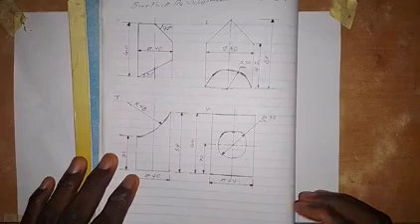Welcome back to my channel. Here we want to work on this particular problem, and it has to do with surface development of cylinders. We have worked on this one and this one.

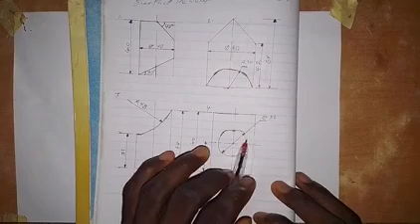We want to work on this last one, based on the dimensions that we have here. So the diameter is 44 millimeters and the height is 60 millimeters. Distance from here to the center line of this circle is 30, and the diameter of the circle is 32 millimeters. We are going to make use of this dimension to solve this problem.

So what we need to do first is draw a vertical center line, like this. I need to bring it down a bit so it goes properly. Then we come up a bit and draw a horizontal center line like this, and then with a compass take a measurement of 22 millimeters, which is half of 44 millimeters.

So we take 22 millimeters here, so this is 22 millimeters. Then putting a pinpoint to our compass here at this point, we draw a circle like this, and we're going to divide this circle into 12 equal parts.

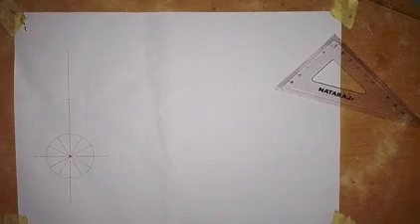So there it is. We draw from here to here, and we also draw from here to here. Then we turn to this side, so we draw from here to here, and then also from here to here.

I'm going to number the points on this circle. I'm going to call this 0. So this is 0, this is 1, this is 2, this is 3, here is 4, this is 5, 6, 7, 8, this is 9, this is 10, and this is 11.

So we come up a little bit and draw a horizontal line here like this, and then I'm going to take a measurement of 60 millimeters for the height. So this is 60 millimeters. Then I will also take 30 millimeters for the center of the circle that we have there.

So I'm going to draw a vertical line from this point 0 here. Draw a vertical line from 0, so it goes up from here like this, and then also from here we draw a vertical line.

So then we draw a horizontal line here. I will make this horizontal line a thick line at once like this. Then on this center line here, we draw a horizontal center line through this point.

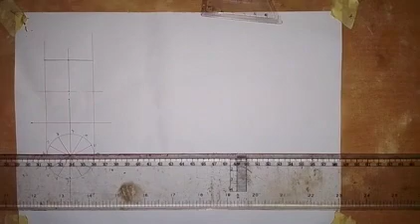I will take my compass and take a measurement of 16 millimeters, which is half of 32 millimeters. Since the diameter of the circle at the center is 32, the radius is 16. So we take a measurement of 16 millimeters like this.

Then putting that at the center here, I will draw a circle. So draw a circle like this.

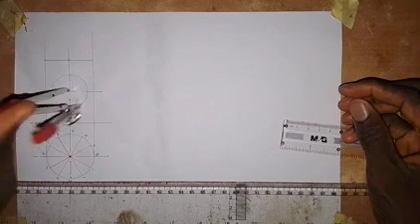So then we are going to make this line. This line is a thick line, and this line here also is a thick line. Then the line at the base here we also make a thick line like this.

Now the next thing I'm going to do is, with my compass, transfer these points on the circle into the front elevation. So from the plan we transfer: 1 and 11 go together, so here we draw a vertical line. Then 2 and 10 go together, so we draw a vertical line here like this. Then we have what we have drawn out of 3 and 9, which is the center line. Then 4 and 8 go together, so here from 8 I will draw a vertical line.

Then 5 and 7 go together, so from 7 I will draw a vertical line like this. Alright, so with what we have here, we are going to produce the surface development.

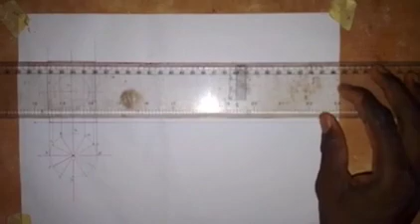So what we need to do now is, from this base here, draw a horizontal line like this, and then we come up here also and draw a horizontal line from this point. Then I'm going to move away a little bit and draw a vertical line. So I can decide to use anywhere that I like as a seam.

So I'm cutting it here and I want to spread it. I'm cutting it from this 0, so that means this point will be 0.0.

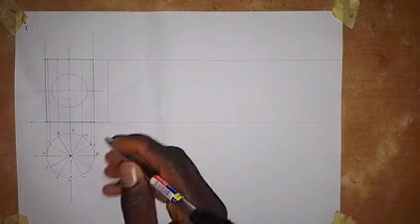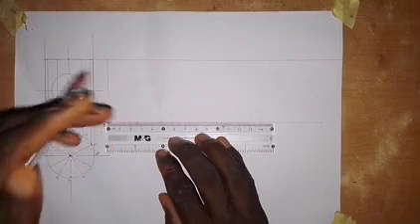Then I will calculate the circumference of this circle. The circumference of this circle, which I've done, is 138 millimeters. So I'll take a measurement of 138 millimeters from here. That is what we have this to be, 138 millimeters. So this 138 millimeters I'm going to divide into 12 equal parts.

Okay, so from here I will draw a line at an angle to the line. I'm going to take 12 points here on this line, so 12 different points on this line.

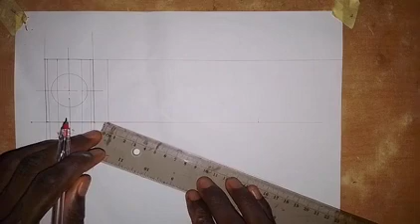So here we have what we have. This is 1, this is 2, this is 3, this is 4, this is 5, 6, 7, this is 8, so this is 9, here is 10, so we have 11, and then we have what we have 12.

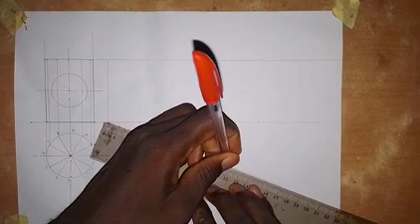Alright, so we join the last one to the end of the line. I'm going to pause the video and do the rest, then I'll come and show you the next thing to do.

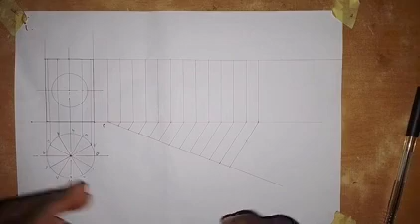Alright, so I have drawn the lines, join the point here, dividing the distance from this 0 to 0. So this point will also be 0. If you cut it here, we're going to have 0 on both sides, so this is also 0. So I divided into 12 equal parts, I divided the circle into 12 equal parts.

Then I need to number. This is 1, 11. So this point will be 1, and this will be 11. Then we have what we have 2, here we have what we have 10. So we have 3, then we have what we have 9.

Then we have 4. Then next is what? So we have 4, so 4 goes with 8. So we have this. Then next we have what we have 5, and then we have what we have 7. So 6 will be in the middle here. So we have those points.

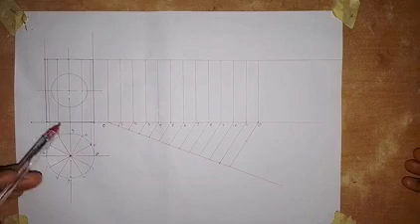So the next that we are going to do is make sure we have this circle drawn in here. So we also have the circle on both sides, so we need to draw it here and also around here.

Now if you look at the midpoint that we have here, this point is 3 and 9. Okay, so we have this point 3 now, so this is point 3 here on the line, and this is point 9. So we are making use of this point, and then we are going to locate this point here, we need to get this point.

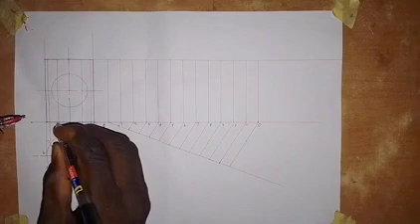This is point 8, so we have this point 8 already. So point 8, we have what, 8 and 4, they are together. So we have this point 4, and then we have this point 8 here.

And then we also have point 2 and 10. So this is point 2 here, and on this side we have what we have point 10. So let's be taking note of that.

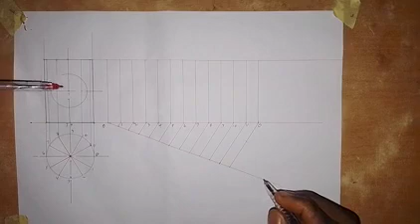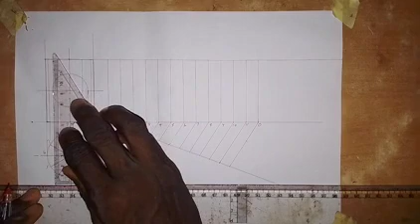But another thing that we need to do is that we don't have a line on this point of the circle, and we don't have any line on this point of the circle, so we are going to create it ourselves. So from this point here, I will draw a vertical line from here to touch this point, and I'll also draw a line from here to touch this point on the circle. Now I will take my compass.

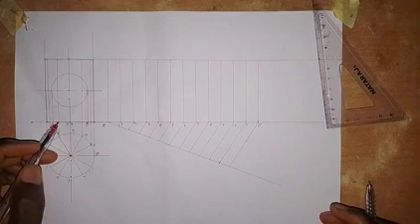Let's call this point A and this point B. So from point A to this point here, we are taking this point. From here we take this point, and we also take this one. This is point 8, which we already have. Point 4 and 8, we already have those points, and then we also have point 2 and 10. So we just get point B, and then we get point A.

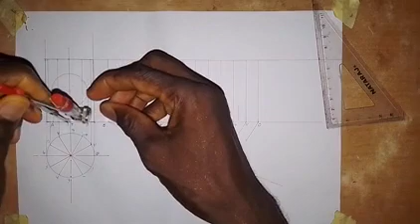So what we need to do now is, with our compass, I'll just do it at once. I don't have to be taking it both sides. So I just put the midpoint of my compass here and extend it to this point B here, to this point B. So if I put at point 3 here...

...so I will get it on this side, and I will also get it on this side, I get it on both sides. Then if I put at point 9, I will also get it on both sides, getting it here and getting it here like this.

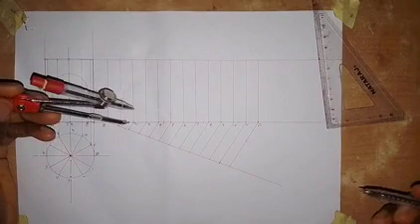So if you look at the one that we have here, this is after 2, so after this 2, that's where we have it. And then it also goes with 10, so after 10, it goes with 10. This is after 2 here, from here to here. Then after 10, that is from here to here. Another one that we have is 4, 8.

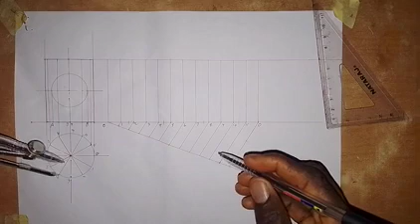So behind 4, we have it here. And at the front of 8, we have it here. Just look at the way I'm doing it.

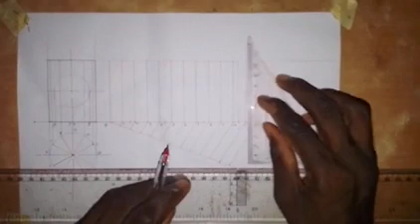Now we are going to draw a vertical line here like this. And at this point also, I will draw a vertical line. Then at this point, I will draw a vertical line here, and also at this point, we will draw a vertical line.

Based on the labeling that I did, this is point A here, and this is point B here. Let's take note of it. And also, this is point A here, and this is point B here.

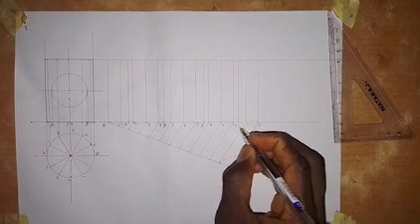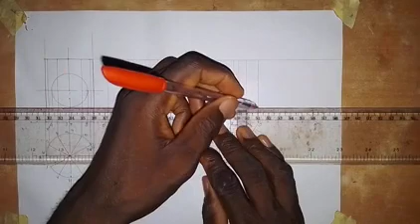So this point that we have here goes for 3 and 9. If I come up here, I will draw a horizontal line like this, and look for where this line intersects 3 and 9. It intersects 3 at this point, and it intersects 9 at this point.

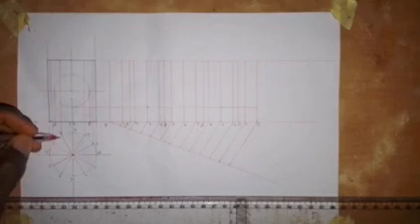So then this is point 8, and this is point 10. Don't forget that 8 and 4, they are together, and 2 and 10, they are together. If I draw a horizontal line from this point, I go and look for where it intersects. It intersects 2 at this point.

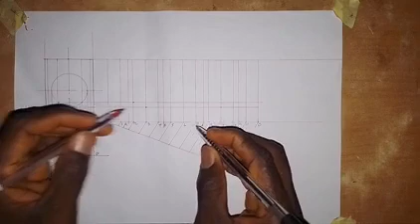I will also look for where it intersects 4 — this is the point here. Then I will look for where it intersects 8, which is at this point here. Then where it intersects 10, which is this point.

Okay, so next, A and B. Here we have A, this is the point. If I draw a horizontal line from here, we have A and we have B at this point, on the same horizontal line.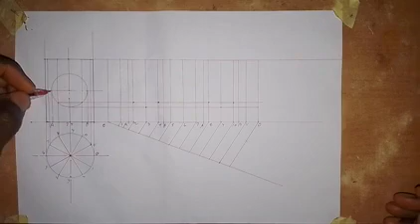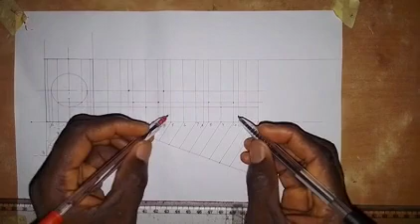If I draw a horizontal line from here like this, I look for where it intersects 1 — at this point here. Then it intersects 5 at this point. Next, it intersects 7 at this point, and it intersects 11 at this point here. So we take note of it.

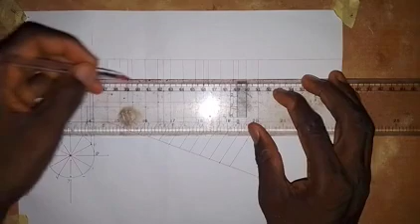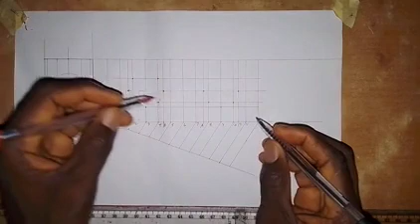So next we also have this point and this point here, which is for 4, 8, and 2, 10. If I draw a horizontal line from here, I go and look for where this line intersects 2 — at this point. It intersects 4 at this point here, then it intersects 8 at this point, and it intersects 10 at this point here.

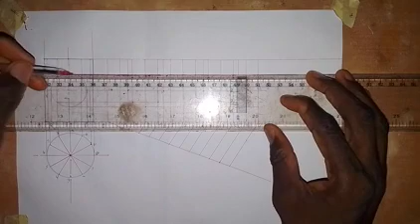So next, I have this to be 3 and 9. I will draw a horizontal line from this point here, and look for where it intersects 3 — this is where we have 3. Then here we have 9.

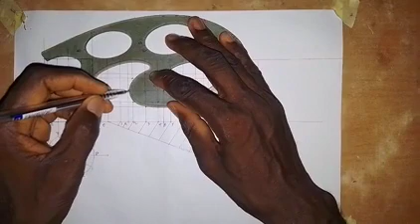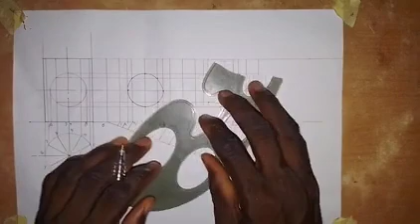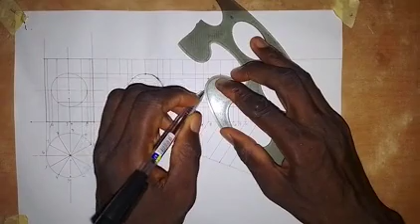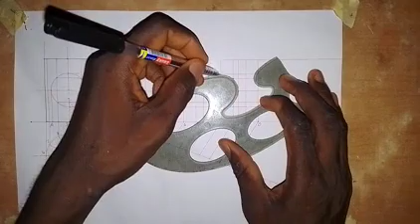Alright, so what I need to do is join the points together. I think I should be able to join these three together like this. Alright, I've been able to join those three together, then like this. I'll also join this together, and can join these three together like this. Alright, so I can join these three points together. I have this, these three being joined together. So next, I'm going to join these together, and then join these three together like this. So we join these three, then join them together, and then these three can be joined together like this. I think this is what I ought to have done here, but still okay.

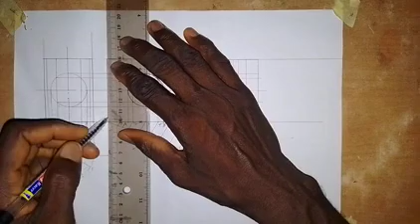So next we just need to make this line a thick line like this, and then make this line a thick line, and then make this line a thick line, and also this line, make it a thick line. So this is the surface development of this truncated cylinder.